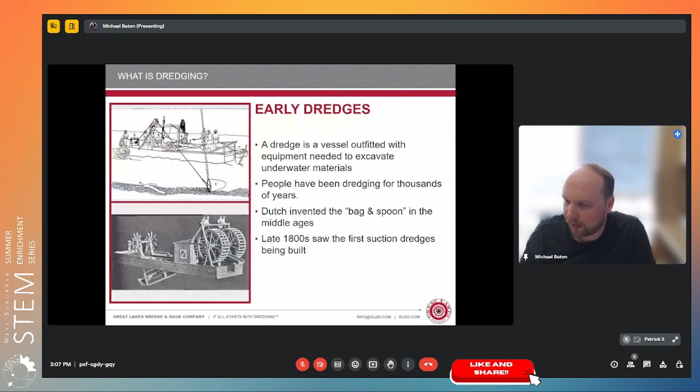So there's 3 basic operations to dredging. First of all, we have to cut or disturb the material in the water, so that's at the seabed. We transport that material to the surface. And then once we get it at the surface, there's many different ways to transport that to a disposal location. And that could be a beach, that could be an offshore dump area. It could also be taken up and unloaded for beneficial use. So there's many different ways that we use the dredge material.

So dredges typically get classified based on how they perform these functions. At Great Lakes Dredge and Dock, we classify our equipment into 3 categories: mechanical dredges, i.e. clamshells, backhoes, and dippers. We don't currently own any dippers. We did many, many years ago. And backhoes, you can think of as sort of like your excavator you see on a normal construction site.

Then we have hydraulic dredges. So these we call cutter suction dredges. They cut the material at the seabed. They then use pumps to bring it to the surface, and then they hydraulically push that down a pipeline to a disposal location or into a scow.

And then we have hopper dredges. So this is a completely self-dependent vessel. It goes to a borrow area or a sand source, digs the material up using drag heads for cutting, and then pumps hydraulically transport it to the surface. Load it on like you'd expect a normal vessel. The material gets dried through overflow, and then we sail that to a disposal location. And I'll show you pictures of these in a little more detail as we move along.

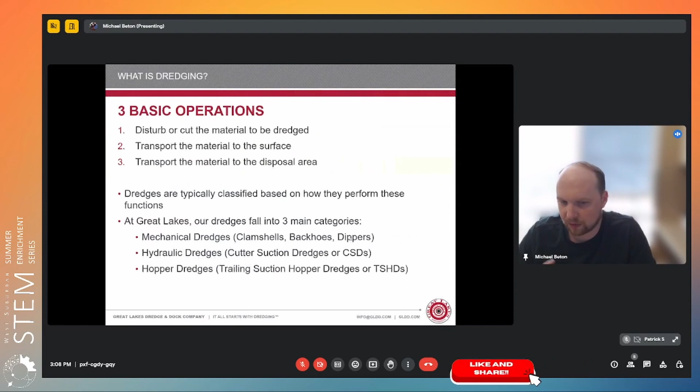So disturbing the material. There's a number of different ways we can do that, right? We can do that by pre-treatment. We can blast material. That's one way we deal with very hard rock. We've done that in the past. By rotating a cutter head, so that's why I said the CSD rotates a cutter head, and I have pictures to show you guys. Teeth dragging, so a drag head is an instrument for cutting the material in a hopper dredge. It's dragged along the sea floor.

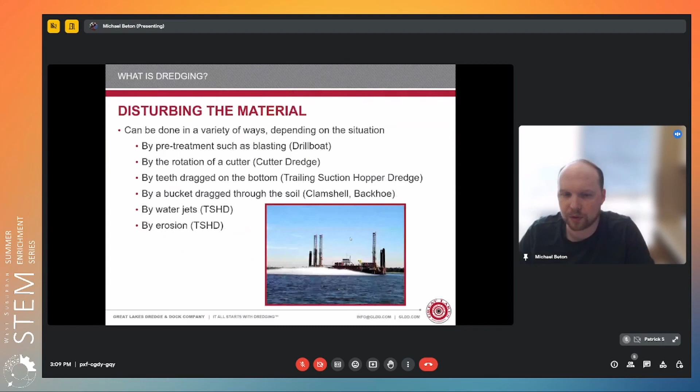Think of a vacuum in reverse. A bucket dredge, which is then, like I said, like an excavator on a construction site. And then there's a few other little things. We can use water jet erosion in the teeth of a drag head or on a water injection dredge. You can use that to kind of disturb and break the material, or through erosion of that process as well.

So once the material gets to the surface, and I swear there's pictures in this presentation, once you get the material to the surface, it must be moved to its disposal location. So we often do that with a slurry of material. So that's a mixture of soil and water through suction pipe. And sometimes we can also do that by lifting it mechanically with our excavator, literally just scooping it off of the seafloor, or off of the seabed or sand source.

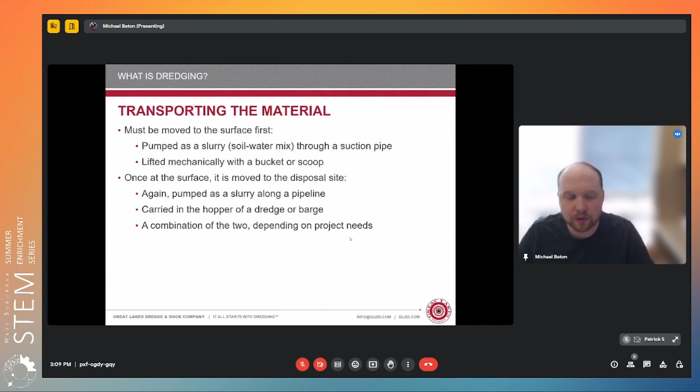Once at the surface, it gets moved to the disposal site again by either pumping it hydraulically along a pipeline, put into a hopper bin or a scow and taken somewhere, or a combination of two depending on the type of project and material that we're using. So these are the types of dredges that we operate in. So remember I said mechanical, cutter, and hopper. So let's first look at a clamshell dredge.

This is mechanical. And as you can see there, on the left-hand side, we have a dredge dropping a large bucket. These buckets can range anywhere from about 12 cubic yards to 50, 60 cubic yards in size, depending on the vessel. And they go to the seabed. They drop, they use their natural weight to penetrate into the material, and then they close. And as they close, they pick up the material and it's hoisted back up. The crane hoists it back up to the surface, and that crane rotates around a point, which allows it to swing the material into a barge.

So these are very quick to set up machines. They don't require an awful lot of support equipment. They're very good for turbidity, for environmental reasons. They're probably the least expensive type of dredging operation. Poor performance in hard material because you're reliant on the weight of the bucket. And then they're very good at transporting long distances because we load into scows and then we sail the scows away, and you can sail them for as long as you like. Very good at digging soft material because it's bucket weight, and good at multiple digging depths because you're only limited by the length of your wire.

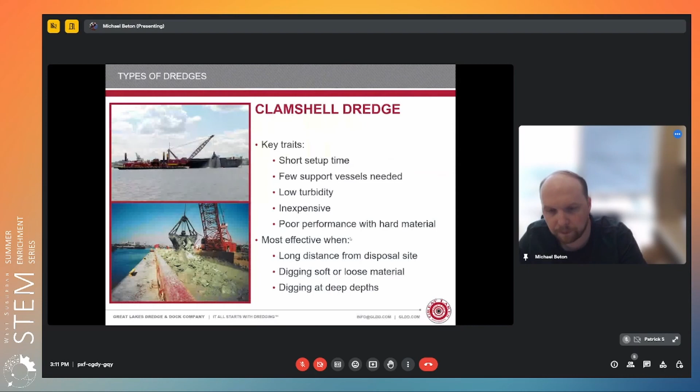So here's a picture of our Dredge 54, which is one of Great Lakes' larger clamshell dredges. You can see there the crane, you can see the bucket, and you can see the bucket just breaking the water as it drops into the water, and they'll rotate, pick that up, close it, lift it, and put the material in the scow sitting on the left. And you can even see a crew boat in the back sitting alongside the dredge, which is where we transport engineers and staff back and forth from the vessels.

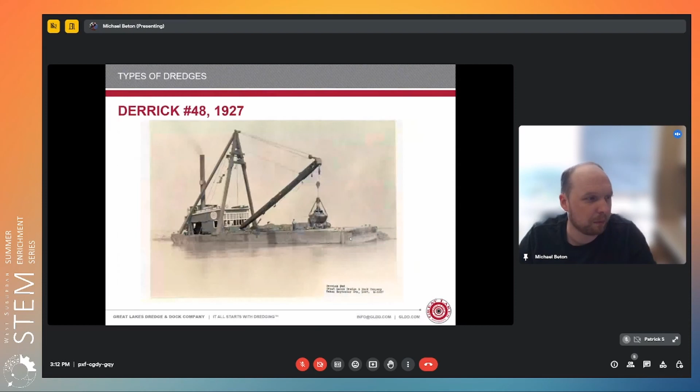Here's another one, the 48 from 1927. Again, this is probably steam powered by the looks of it on the back, and a very small bucket. And rather than the whole of the clamshell rotating completely around a point, this one is just moving the actual arm left and right. Then we move on to backhoes and dipper dredges.

We see the Dredge New York in the top left, and that's the one I said was very much like an excavator that you see on a normal construction site. So that uses positive force and pushes its arm into the material to scoop it up. And then we have the dipper dredge in the bottom, which is the other way. It uses positive force to pull the material from under up.

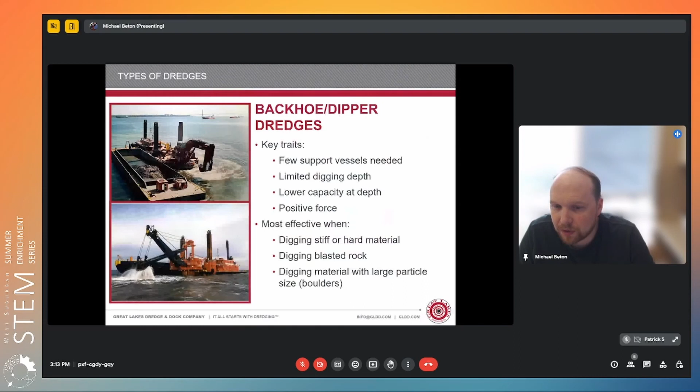So very few support vessels needed for these, again, but they're limited by dig depth because the arm dimension determines how deep they can go. They have lower capacity at depth because the further down we go, the more extended the arm becomes, the less weight they can use. They're very good for positive force, as I said, scooping. They're good for digging clay materials, hard materials, blasted rock, or large-sized boulders that need to be removed.

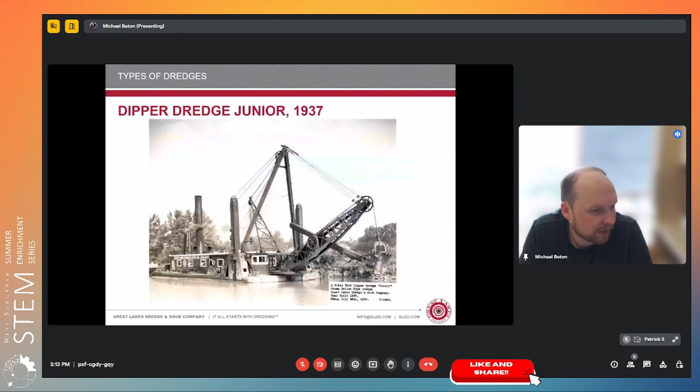So this is the Dredge Junior sitting on one of its projects. You can see the scow in the background. And again, this is a dipper dredge. This is a 4 cubic yard bucket in comparison to the 26 plus cubic yard buckets we use on them today, and digging material in a river somewhere. I'm not sure where that picture was taken.

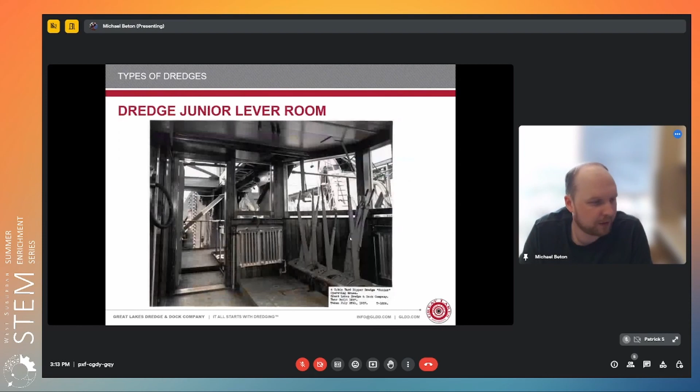And you'll often hear in dredging, we call our control rooms lever rooms. Today, our rooms are joysticks, digital screens, and touch panels. But back in the day, a lever room really was pulling levers. So this is a nice picture of that.

So that moves us on to our second type of vessel, which is the trailing suction hopper dredges. These are self-contained vessels. They don't require any attendant plant hardly ever. They're very good for digging loose material. They can agitate very soft material, and they can potentially lead to higher turbidity, but it depends on the material type that you're digging. Most effective when long distance from disposal site because they can load and then sail to a site. Material is soft and fine.

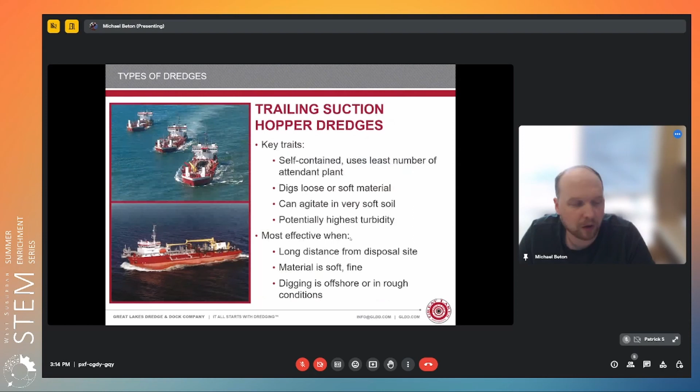They're very good at sorting that material out, and then digging offshore in rough conditions. So sometimes when we dig in a bar area, we can have 6, 7, 8 foot seas. These dredges can continue to operate, where other dredges would have to go to dock to get out of the weather.

So our little dredges, our Manhattan class dredges, are split hulls. So the ship literally splits down the middle, so they can open up to dump their material. You can see that in a second. But here's one of it loading, and then here's it unloading when it bottom dumps the material. We also pump the material out.

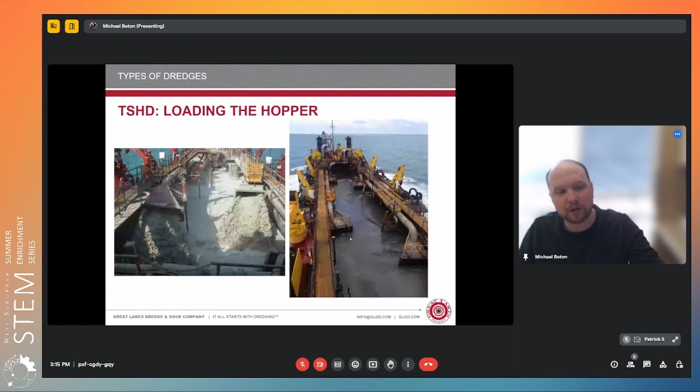So what happens is the material is loaded in by a slurry, and you can see that slurry. And as the material goes in, the heavier particles of the slurry settle out. So the sand settles in the hopper and continues to build until you get something that looks like what's on the right. And all of the water gets overflowed. Then we go to our dump site.

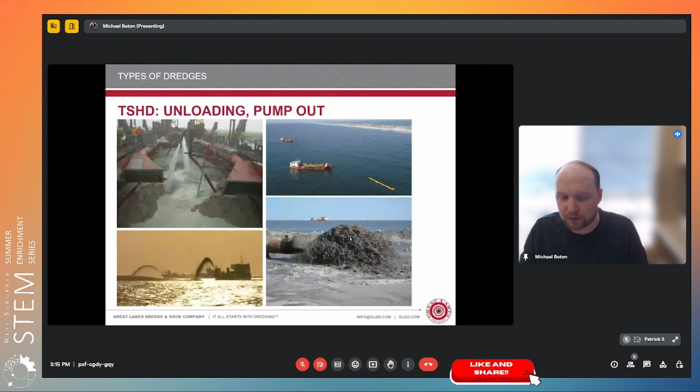This is splitting. We go to our pump out site and we reintroduce water by jets and turn the material that we turned into a solid sand back into a slurry. And then we pump that out directly down pipelines like the top right, or by rainbowing over the seas in the past, the bottom left. And you can see it comes back out as a slurry on the beach. Again, the process repeats itself where the coarse sand settles out and builds the beach or disposal area, and the water gets washed away.

And that brings us on to cutter suction dredges. So you'll see the pictures of the cutter suction dredge on the left, and you can see on the bottom they have a very large cutting instrument. This really is for the hardest of material. They require a lot of attendant plant. They're very expensive to run.

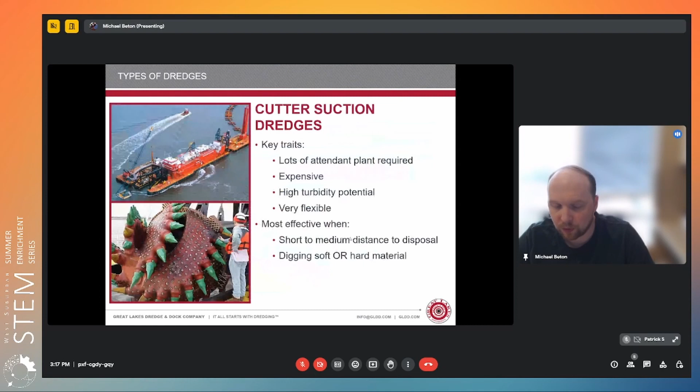They're very large vessels. They have high turbidity potential in certain materials, but not very high in a lot of materials. They're very flexible because you can do everything from the very soft to the very hardest rock with them. And they're very good at short and medium distance because they have to hydraulically pump the material down a pipeline, but they can dig pretty much everything. We've dug everything from muddy water all the way up to very hard, dense rock.

So this is a side profile to give a better idea of what we're dealing with. We have a ladder that lowers into the water, and on that ladder there is a rotating cutter head that digs the material and scoops the material up into a vortex. And then we have an underwater pump that provides a suction to drag that material up through the system into large main pumps. And when we talk about main pumps, we're talking about pumps that can be 108 inches in height, huge big pumps, so they're taller than most people by a long shot. Even the underwater pump is as tall as I am at 6 foot.

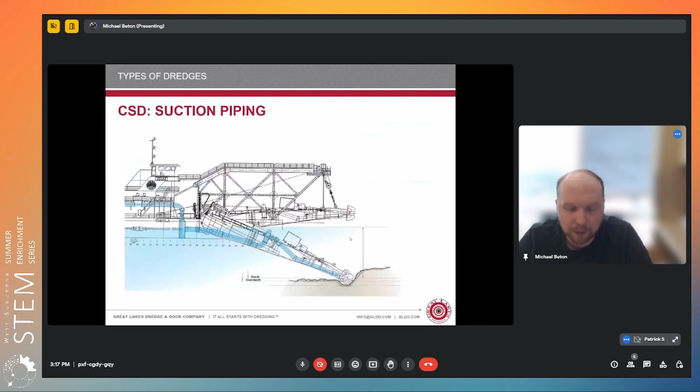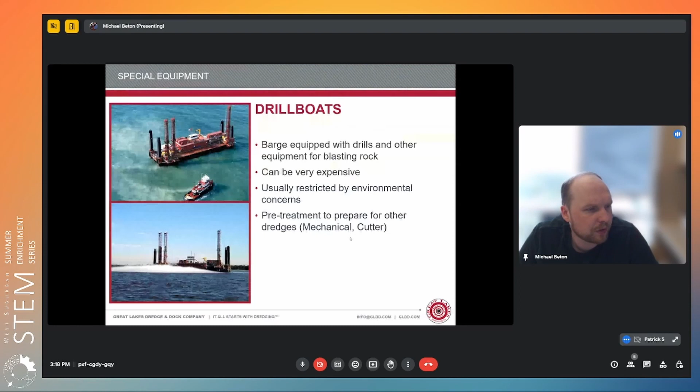It can be very expensive, and there's a lot of restrictions about where you can blast and how big a blast you can have, for environmental reasons and to protect animals, environment, sensitive areas, old docks, things like that. So we have to be very careful about that. And then we have pre-treatment. Once it's pre-treated, we remove it with mechanical or cutting means.

Then for material, you've heard me say scow quite a lot. So material barges, split hull hoppers or deck barges; the one on the left is a split hull. So we put all our material in it, we sail it to our disposal, we split it open, and the material leaves. It's good for long distances. Job sites or disposal sites may have limitations on draft and height. You can see the draft markings on the left-hand side of the vessel there in the white numbers down the side. So we're always checking how much material we can put in before we get to a limitation on how deep we can be in the water. Most of these are unpowered and require a tug to move them around.

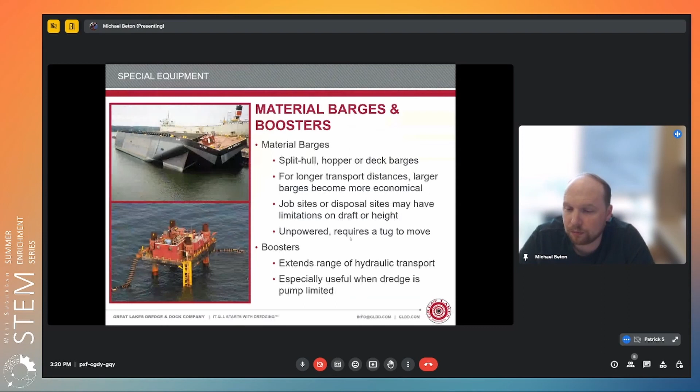And then on the bottom left, we also have a booster pump. We have a number of different boosters in our fleet. So when we're pumping out with hoppers or with cutter dredges and we're putting energy, pumping material down the line, we lose energy through friction losses and angles. And as we lose that, we need to reinstill more energy into the system. So we use additional booster pumps to infuse more energy, put more potential into the system.

Once the island gets big enough, they come in and put armor rock all around the island, to prevent erosion and loss of material, using geotubing, which is a fabric that doesn't allow sand to pass through. They place rock on top to protect the fabric, and then afterwards they'll construct on it. I have a slide later on, Patrick, where you can see this one from Google Earth with the buildings starting to be built on it. Does that answer the question?

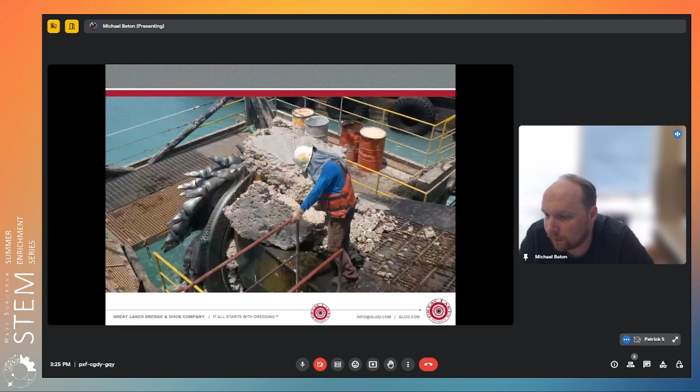Then, early in my career, a lot of times we were digging overseas in the Middle East, and we encountered something called cap rock. It's a very fine layer of cemented sand and sandstone that lives on top of the good sand. So we would have to undermine it by breaking it up with a cutter head underneath. I think this is a nice picture because it shows you the size of a person in relation to the size of the rock, the vessel and the cutter head. The cutter head's 10 to 12 feet in size.

Here's us looking at different wear patterns on teeth. Something we're always looking at is that each one of these teeth costs hundreds of dollars a tooth. So we're constantly looking at how we improve the life of the teeth so they last as long as possible. So we're looking at different patterns over there. That was me when I was much younger.